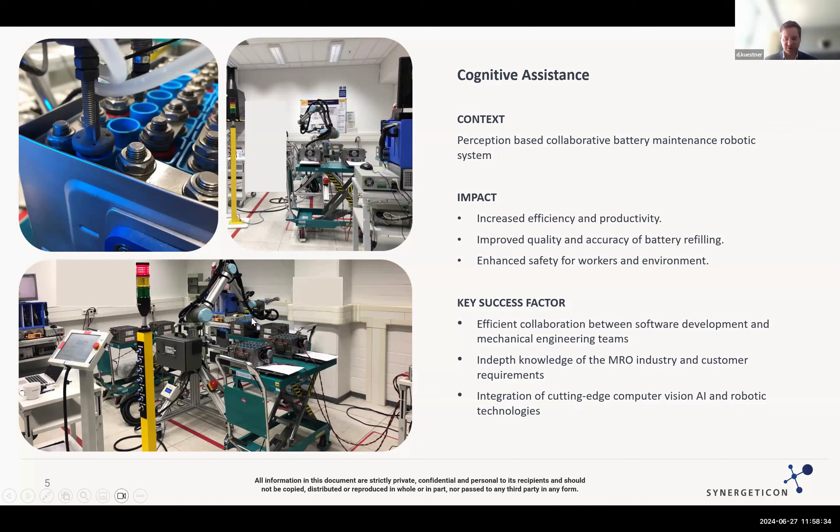This is very typical within aerospace, because you need very flexible systems - you have a very complex product but low throughput, meaning you need high flexibility in your systems to operate this. So we implemented a combination of computer vision, automation, and simulation environments to operate a system like this. We're also doing this for riveting.

Basically it's like a screwing process for structure elements. We also have a helping system that assists in screwing some parts on a mobile platform that can also be operated by the human being. You see the glasses here - this is also one of the projects we did.

It's not so accepted, because even though the glasses get lighter and lighter, it's not broadly accepted to put on - there are problems with some people getting sick, or it's just not very comfortable to have on the head. So we're going more and more into augmented reality on the tablet.

We overlay real data with object data we have, but we can show this on the tablet. I'll show you some examples later. We're moving away from the glasses on the head, more toward mobile solutions on the tablet.

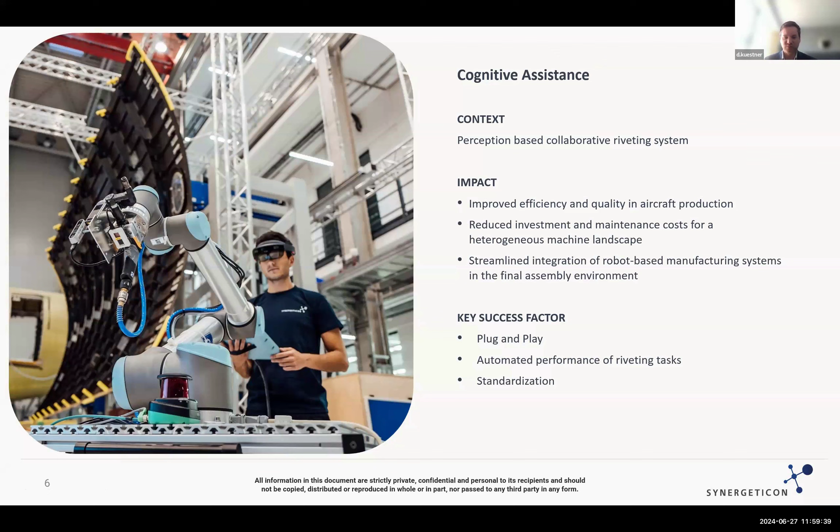Here you have another system - it's not robotic driven, but it's a whole quality process where we use smart tools. They're able to be controlled in real time while operated, because every screw you perform has to have a different kind of torque moment, and it's connected to a digital model.

We're able to perform automated assistance so nothing can go wrong anymore, because every screw is actually checked - we have tool tracking, so we know all the positions. If the worker makes an error, the system stops automatically, so it's failure resistant in real time. This is very useful because you can achieve 100% quality inspection while doing the assembly and the reporting within.

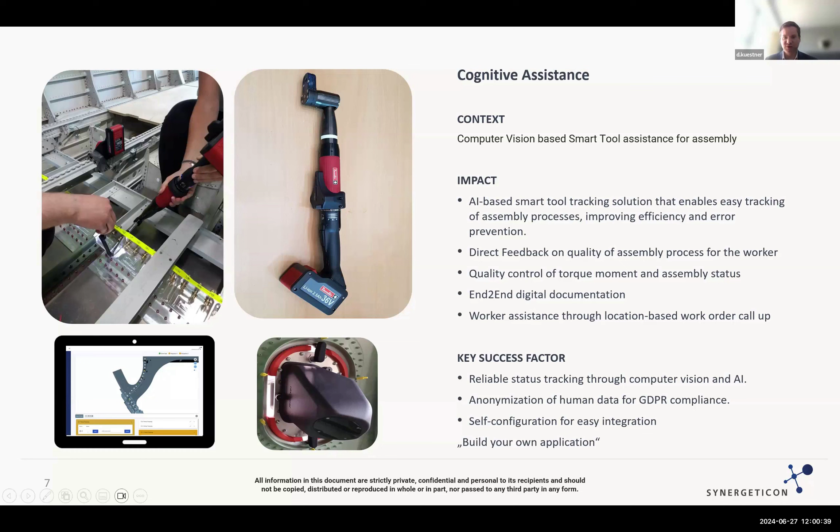Here you see how it works. So we have position trackers, we have smart tools, and also an assistant with a digital model that supports every step. You can just input process data and 3D data because you have different parts, and it's very generalized. So it's not only working for this solution, it's working for a generalized solution with auto calibration and so on. In the Q&A we can go into more details, but I think for now it's okay.

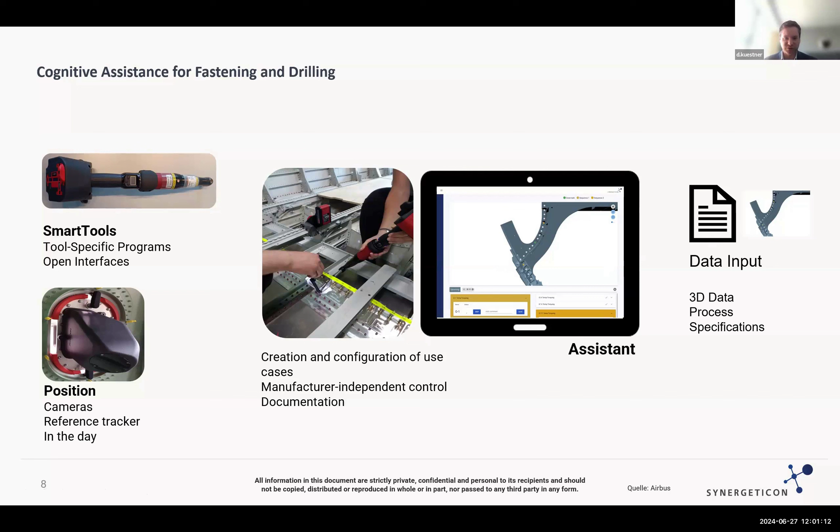I also have a video from the production I'll show you. This is a production environment and it shows basically the application within the production.

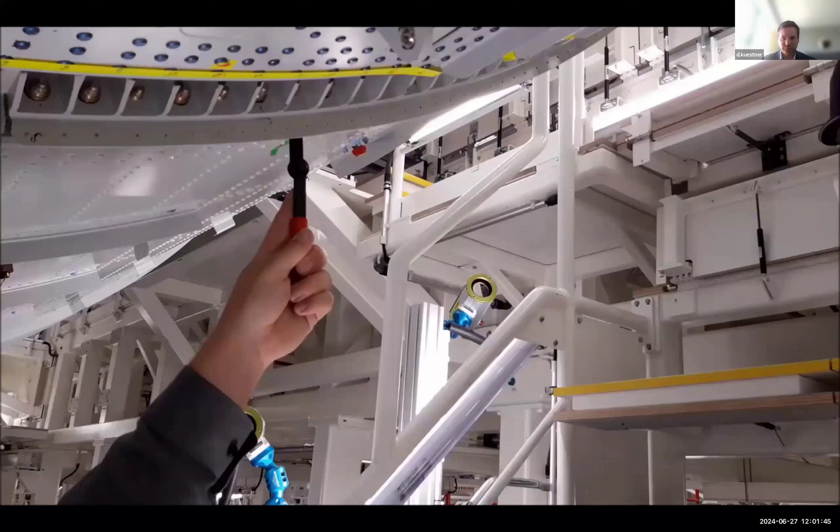Can you hear the music? No, not really, but the video is working fine. Okay.

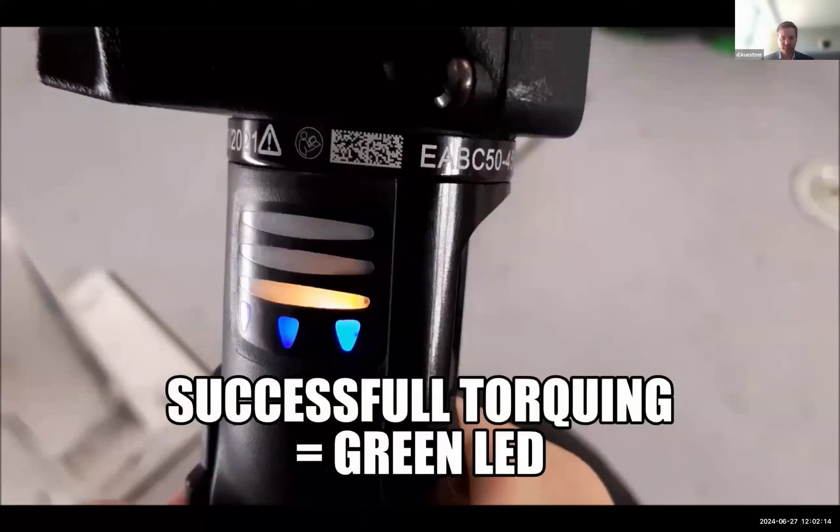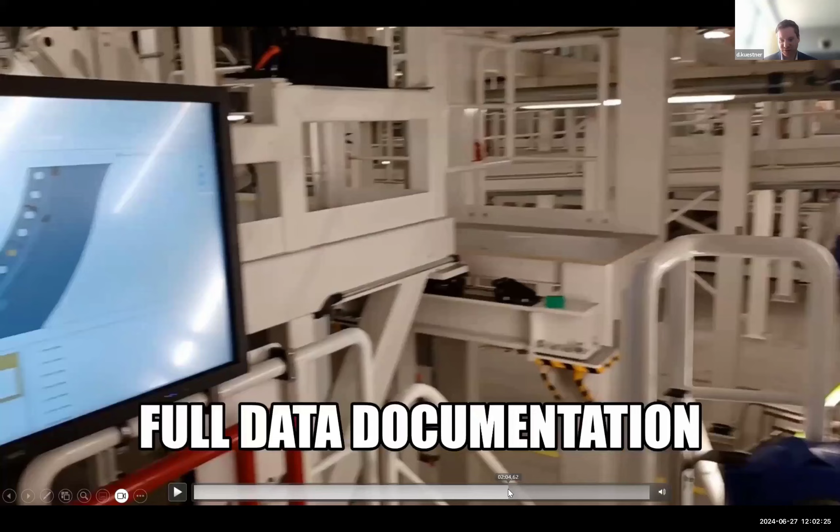I'll skip a little bit because it's too long, but I think it gives you a good sense of what it's doing.

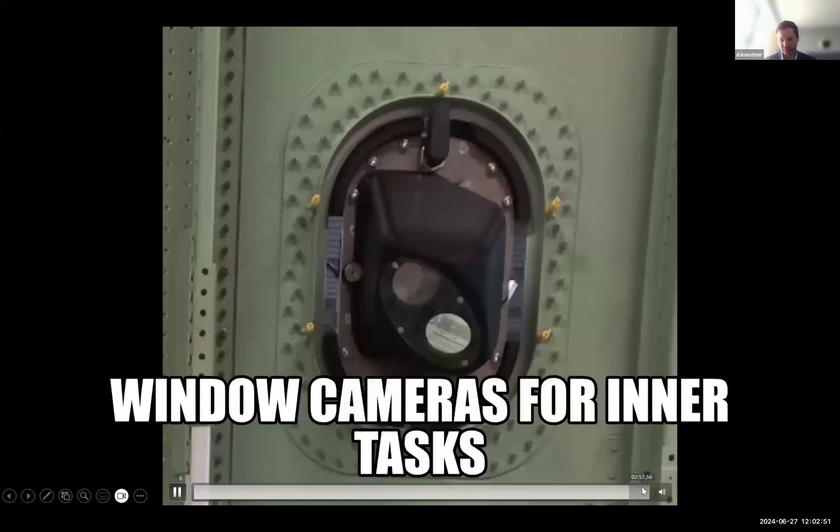All right, so I think it gives you a good understanding of what this is. In the Q&A, if you're interested, we can also go into a deeper dive. You can still hear me, right?

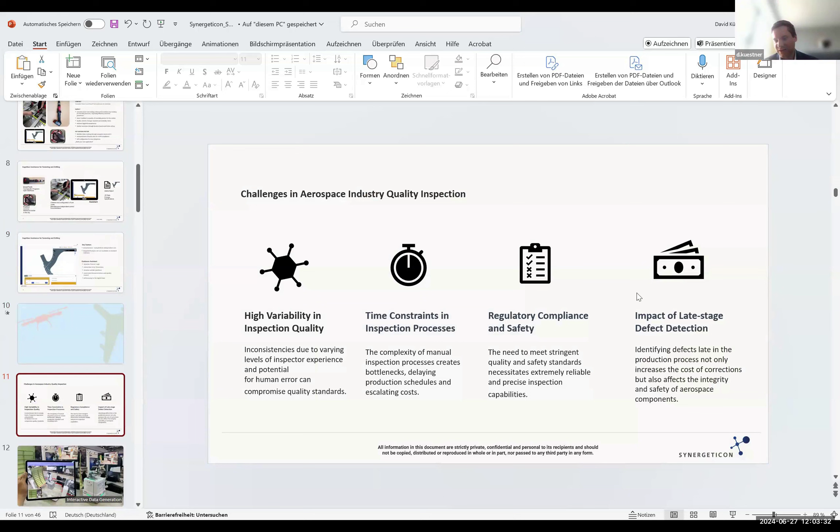Yeah, okay, perfect. Okay, now I come to the quality part. So basically, we talked about this quality before, but I want to show you an overview of what the problem is basically with quality in aerospace. I'll start with the latest, because it's one of the most important.

Wait, sorry, let me go back. So if you find an error too late, it can be very, very expensive, especially when you have very expensive parts, and delays are costly because the whole product is very expensive. So this is actually the biggest issue. And when you think about a business case, one of the biggest business drivers is the improvement of quality inspection within aerospace.

Also, compliance and regulatory safety is very strict in aviation. So it's different from automotive and other industries, because you have very high standards that actually need the support of quality systems to make it more efficient.

The time constraints in aviation mean you cannot just automate all the quality processes in the line like in automotive, because the product is very big and complex, and you have so much variety inside, like you see here. So this is time-constraining, and the variability leads to a high level of expertise required.

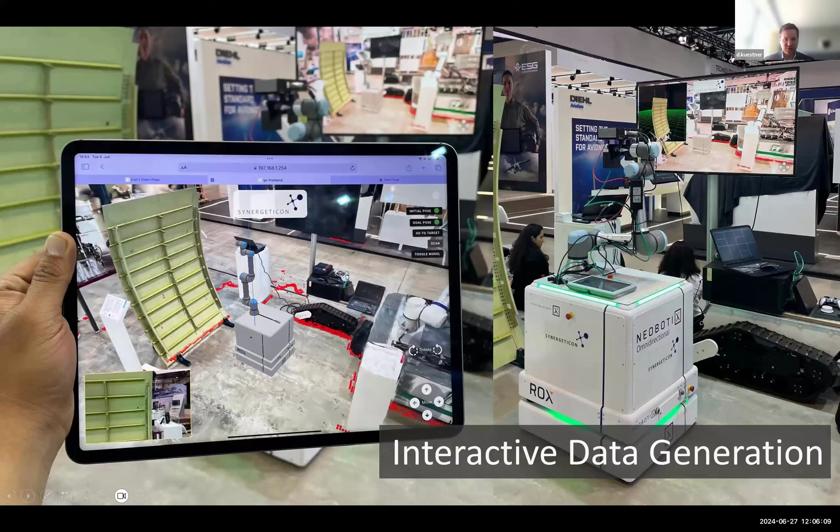Here you also see automated segmentation we use, it's an AI module that actually deploys spatial intelligence. Basically, in the scanning environment, we see what the objects are, and then with an annotation process, we can also interact very easily within this process.

Just telling the robot basically what to do. We're using this also for damage detection or surface crack detection. We can read numbers, we can identify objects, we can identify vectors of different kinds of angles. So for pick and place or for automation of screwing processes, this is really important.

And what's new, we put this all into an easy graphical programming interface. Basically, to control a robot like this and set up all the processes, no programming is needed anymore. You can just put the building blocks together, so you can create your application as a quality engineer on the shop floor in a very easy way, even if your parts are unknown. Because normally you always need CAD data or some digital representation.

We do scanning on the fly within the shop floor, and then we use these assets to control the robot further to perform a different task. So it's very useful, because you don't need to set up a digital twin first with all assets before you even implement a robot. You can just go to the shop floor, put the button on, and basically go for it.

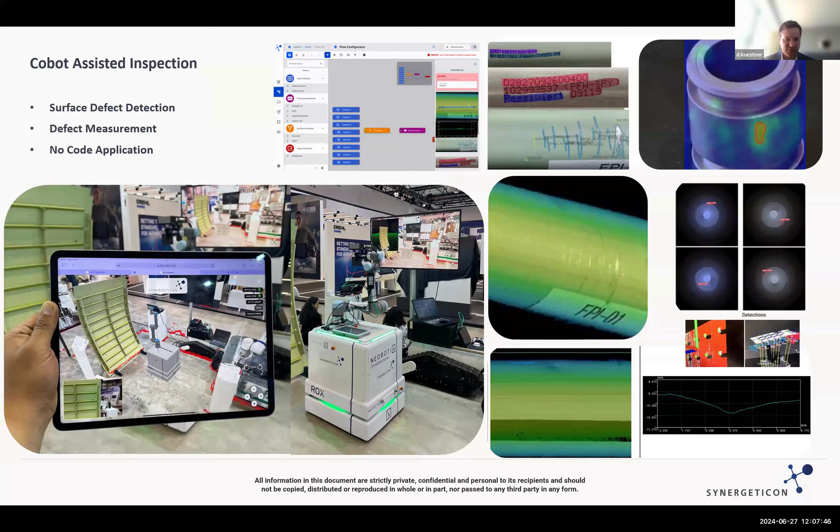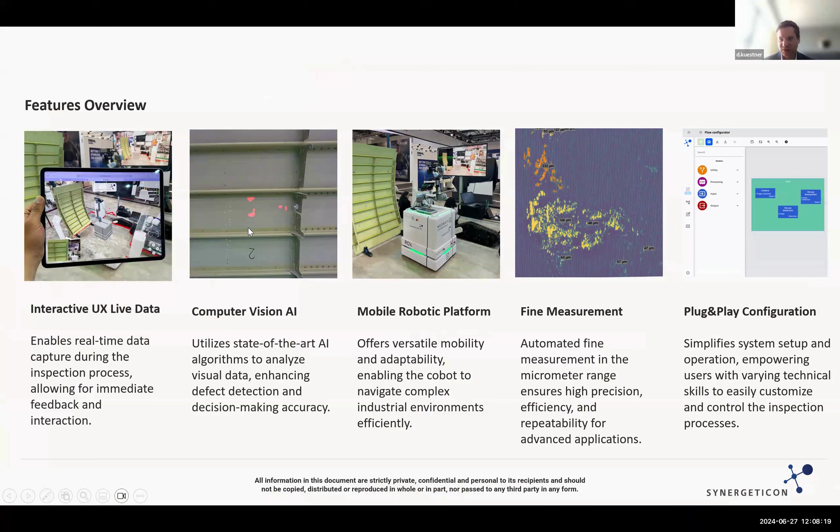So we combine it with interactive live scanning coming in. We have computer vision AI to actually detect objects and also defects and anything. We have the mobile robotic platform, but also fine measurements. So the computer vision works together with the fine measurement. If it finds something, it goes and makes a very fine measurement, because in the aviation industry we need the depth of cracks, not only the surface description. And this can all be done with the plug and play configuration, no code platform, basically what I showed you.

What we use there is also no code for building your whole computer vision algorithm. So basically computer vision means we can detect or segment different kinds of parts. We can detect it, and then we can also measure localization of where it's at when we have more than one camera. But to make it feasible that the customer can really build his own configuration, his own application, we are able to give the platform to the customer.

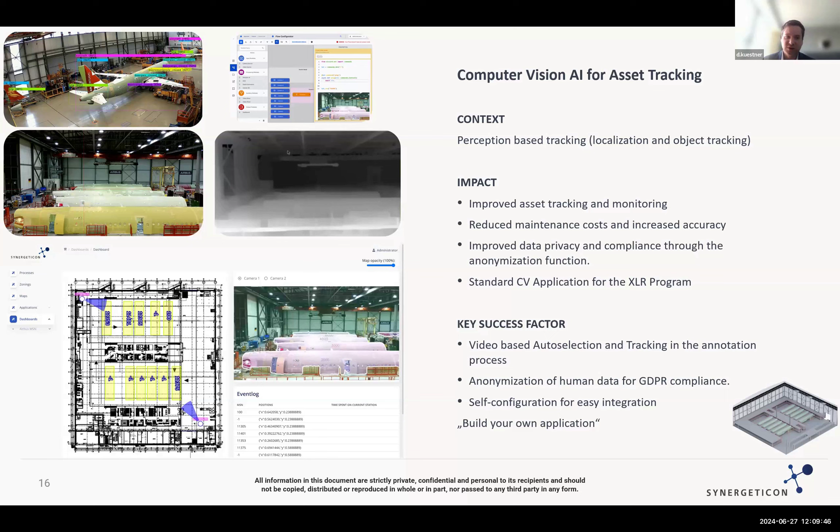Here you see an overview of how it works. So we have the training data creation. It's basically an AI-supported annotation platform. It works like Paint in videos. Basically, you click on a part, it's auto-selected, then it creates the whole tracking in the video. So you can create your own data with this.

You have the infrastructure configuration and data configuration. So if you have a computer, you just put a graphical surface here, add the features to it, and it's all auto-installed on as many computers as you want, so they're all aligned with each other. Then you can create your applications like you want, with also dashboarding in the end. We have a dashboard builder where you can connect all this data together, for an end-to-end computer vision application.

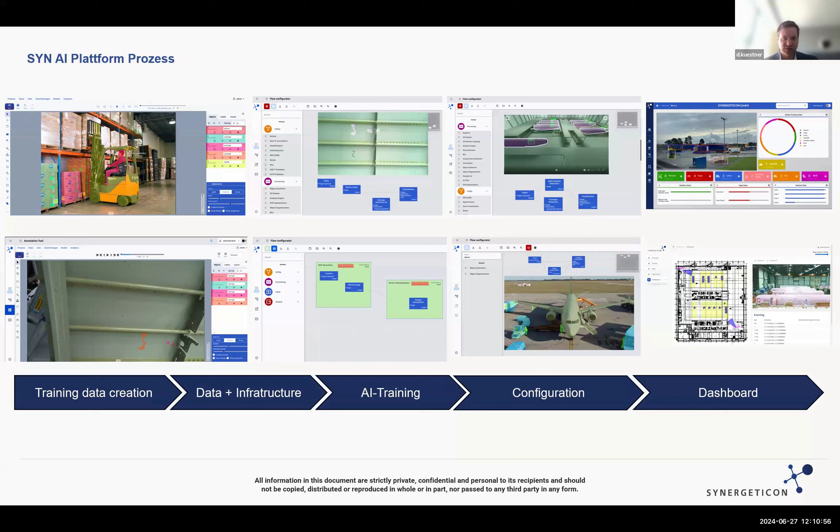This is being used in tracking different airplane parts in production, but we also use it strongly for crack detection, defect detection, and corrosion detection. We have projects where we apply it to bridges, for example cracks and defects of bridges. So these are very widely applicable.

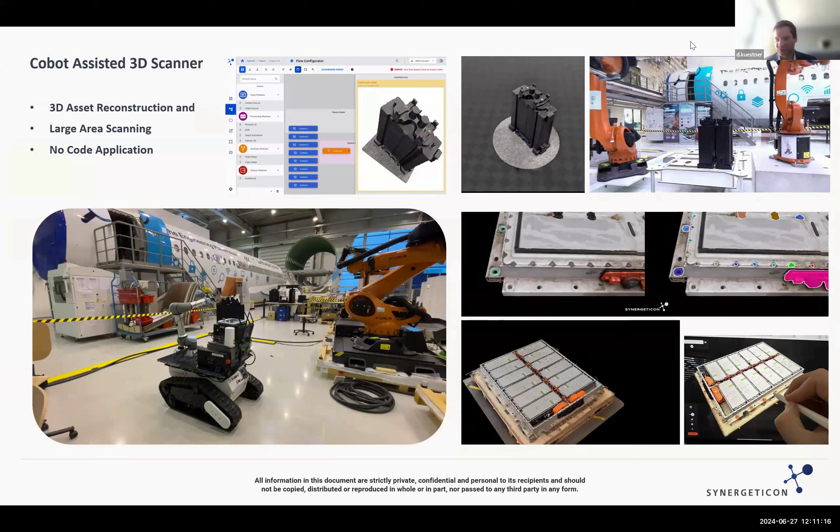Now I come to the 3D reconstruction. So you can see the robot, when it goes and uses its sensors, it can create virtual environments. I don't know if I'm streaming in real time, it looks on me in real time. Not sure how well Zoom is transferring it, but you can see we can actually create the objects from the environment. We can also overlay it with computer vision data for detection of screws, detection of how dirty a part is, and so on. So there are different solutions we are now building on the platform to be operated with this.

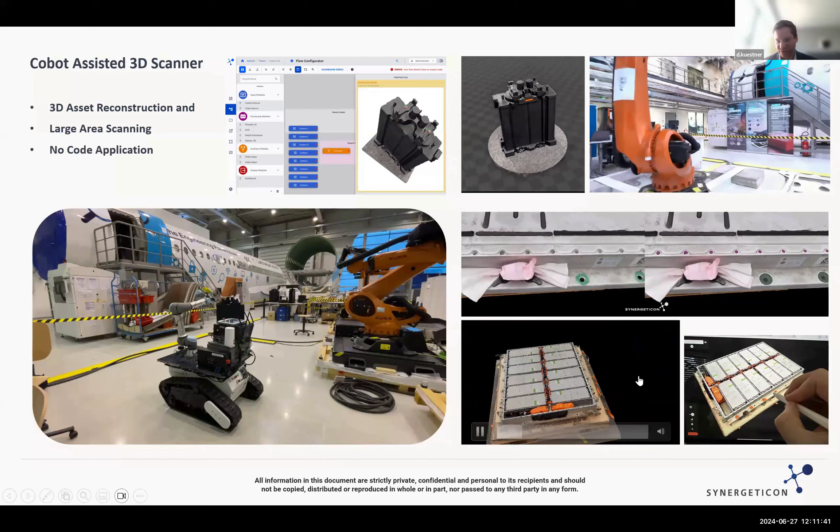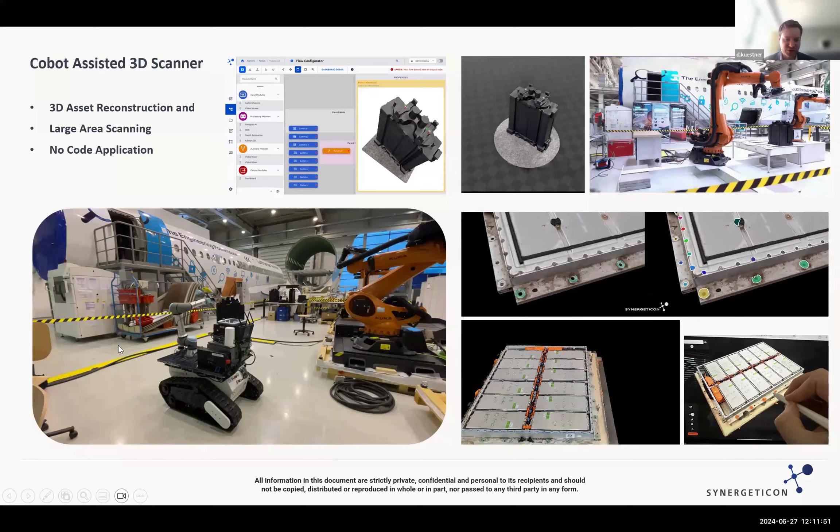Here you see another version of the robot. We also have an outdoor-applicable system, or when you have cables in the way, we have different kinds of AGV platforms to operate these scannings we do in the factories.

Here you see another video, maybe a little bit bigger, to actually see what quality one can achieve with the robotic reconstruction. Here it's a battery module from the Volkswagen cars.

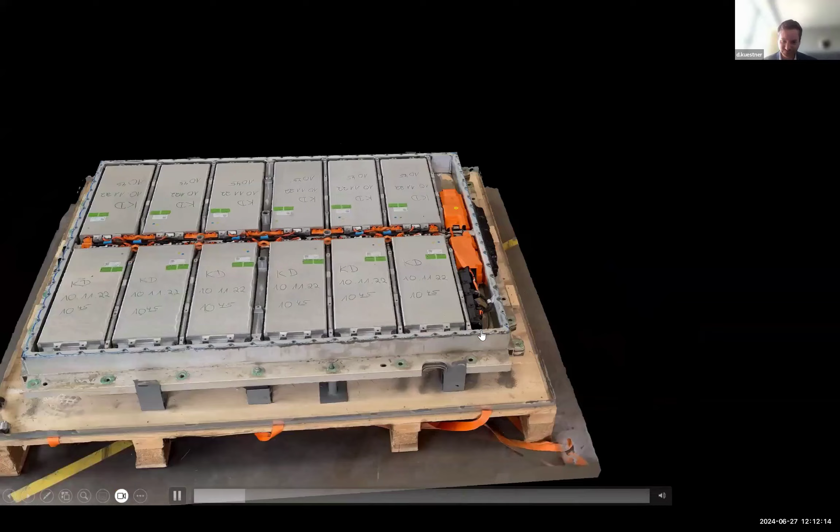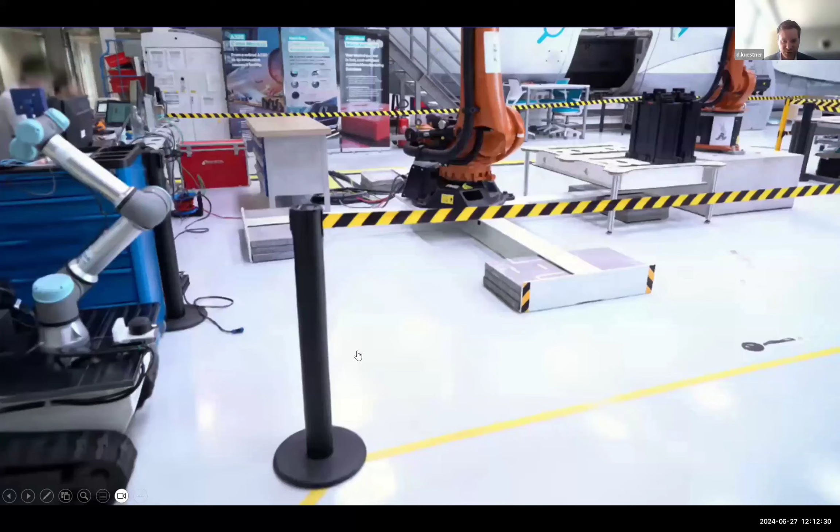With this technology, we're able to construct the essence of an asset. We're even able to read what's on it, or go down to the QR codes. Here you see a large-scale robotic system. When you need a large area, it's important—you're not able to capture all the data you need, so we use generative AI to fill the gaps, to be able with small data sets to even do large scannings of environments.

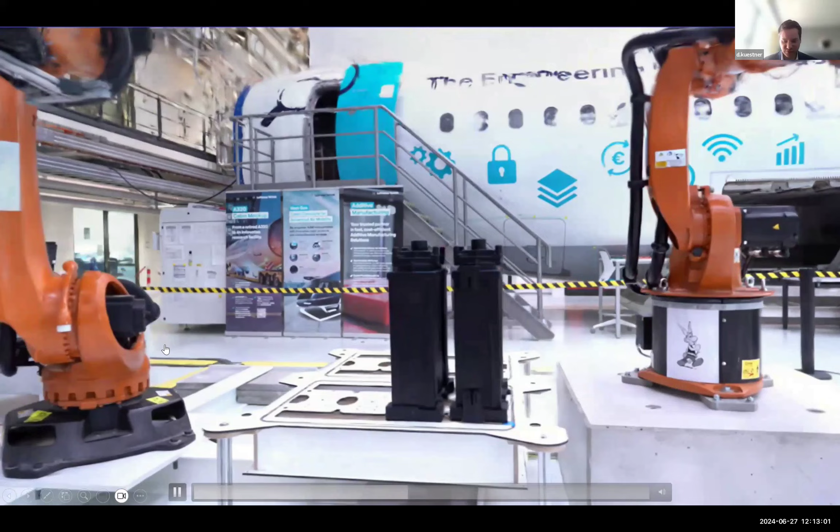This is not a video—this is basically a scan of the environment, so we can go on every angle we want. That's basically right now for all the systems.

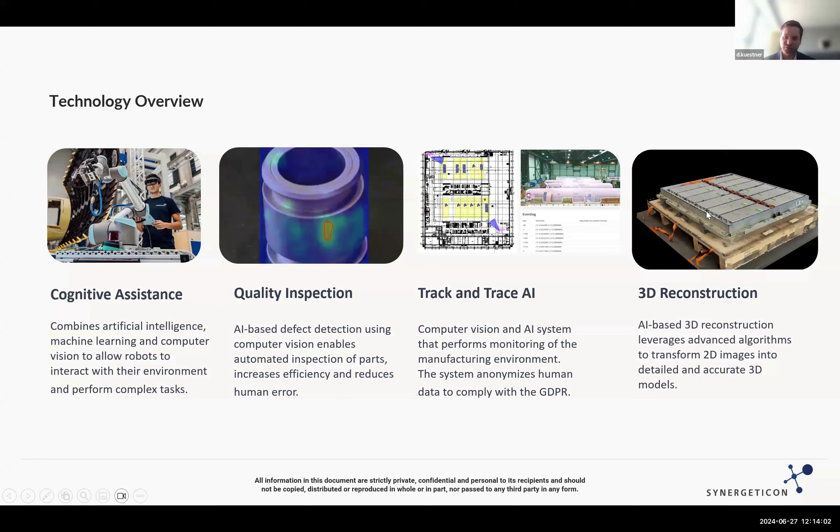So I'll go back for the overview and summarize. I showed you how we can use cognitive assistance—robotic, mobile, lightweight systems—to perform different kinds of tasks inside the aviation industry. This is very important for quality, using these sensors to create quality inspection automatically. I showed you the track and trace application, doing localization tracking and event tracking on the shop floor. And the last part, 3D reconstruction, which is also really important for the aerospace industry to create assets and have a digital 3D documentation of the status of the part.